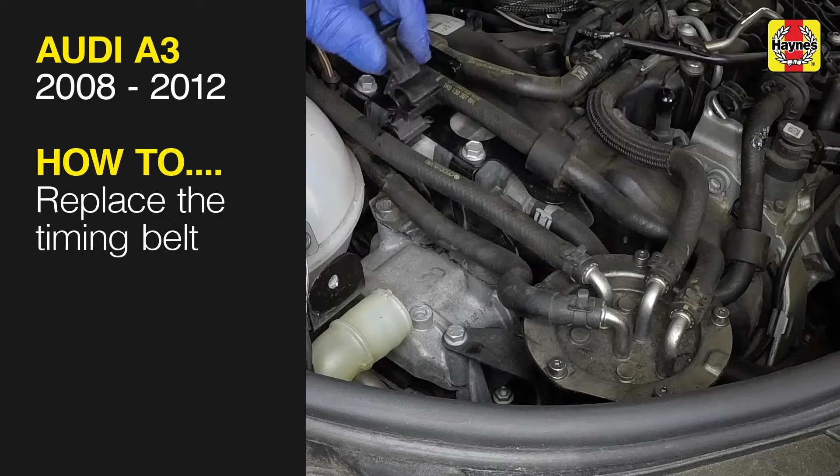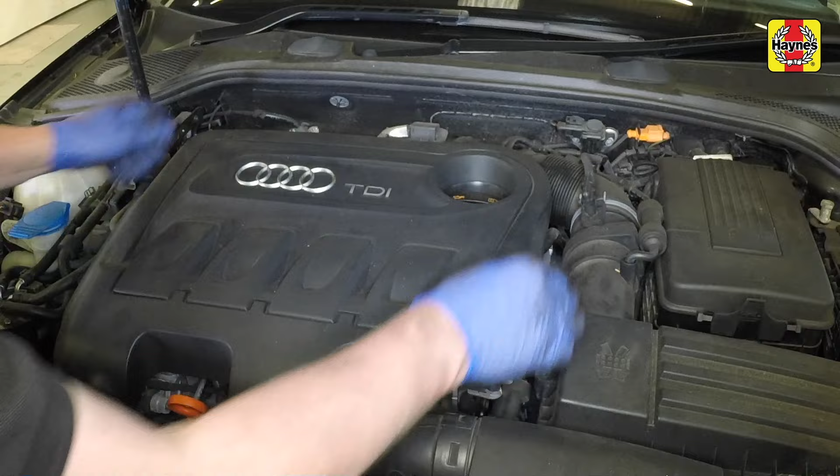Timing belt renewal. Pull the plastic cover upwards to release the mountings. Removal. Using the tool provided, remove the centre cap from the wheel. Where necessary, use the locking wheel bolt adapter and slacken each of the wheel bolts half a turn.

Position the workshop jack adjacent to the jacking point indicated by a triangular notch in the sill. Raise the vehicle until the tyre is clear of the ground, then place an axle stand under the sill flange at the jacking point. Remove the jack. Fully unscrew the bolts and remove the wheel.

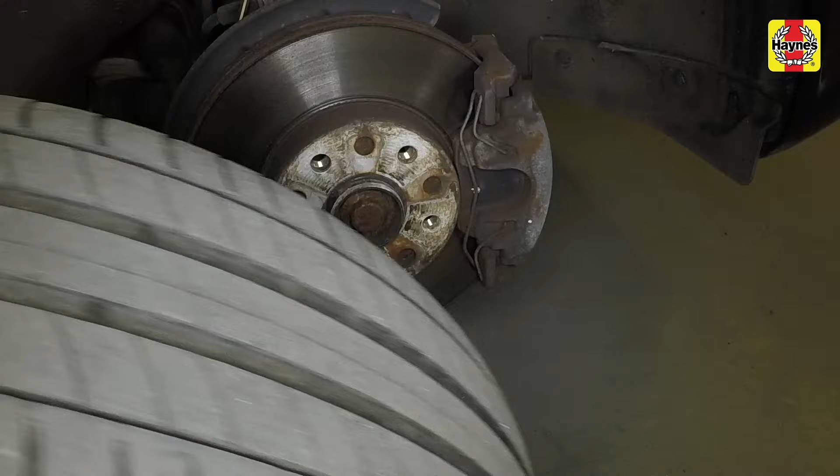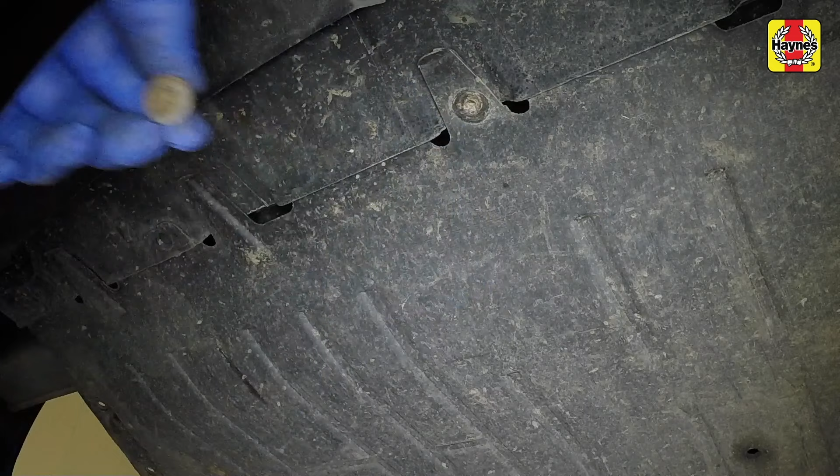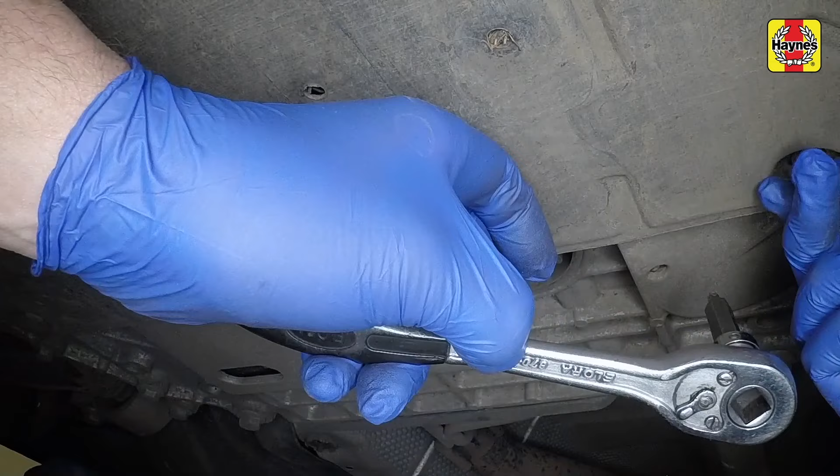Rotate the tensioner clockwise, then lock it in place using a suitable pin, drill bit or Allen key. If the belt is to be refitted, mark its original direction of rotation. Engine under tray. Remove the single screw at the front edge of the under tray. Undo the Torx screws along the outer edges and the screws at the rear. Slide the under tray rearwards and remove it.

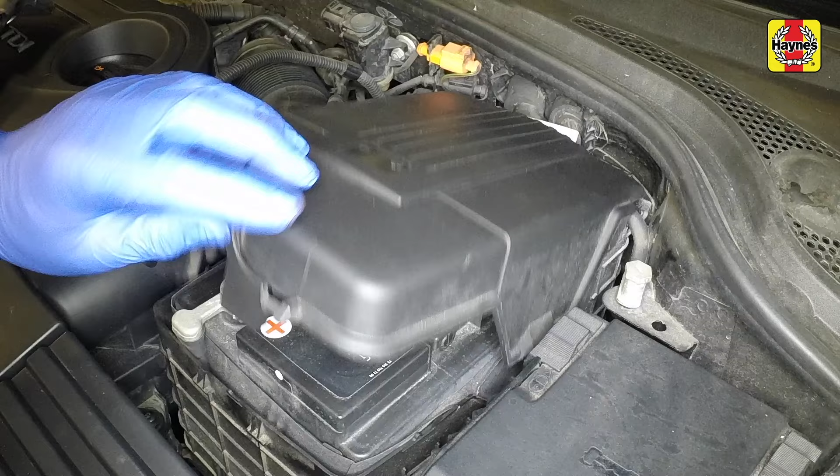Battery negative lead disconnection and reconnection. Release the clip, remove the battery cover and terminal cover, then slacken the nut and pull the negative lead clamp from the battery terminal. Position the clamp to one side to prevent accidental reconnection. It's also advisable to insulate the battery terminal to prevent accidental reconnection.

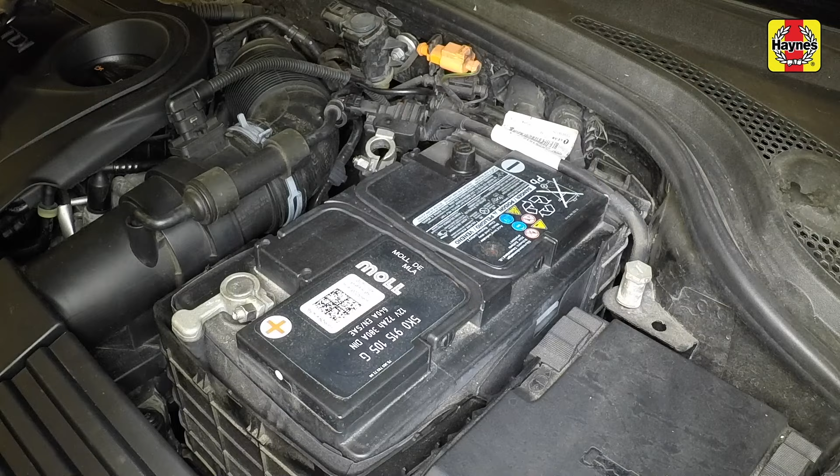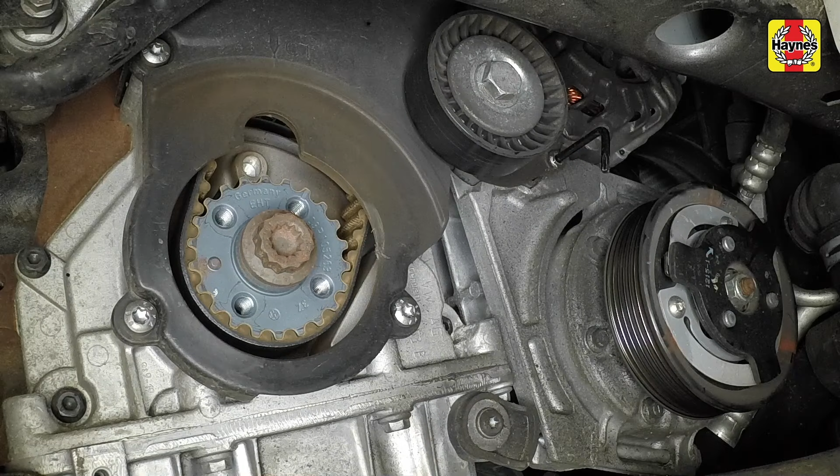Unscrew the 4 bolts securing the crankshaft pulley. Prevent any rotation by counter-holding the hub bolt with a socket. Remove the pulley from the crankshaft hub. Unclip the coolant hoses above the timing belt cover. Disconnect the wiring plug, undo the retaining bolt, and move the diesel particulate filter pressure differential sensor to one side. Undo the bolt and remove the screen wash fluid reservoir filler neck.

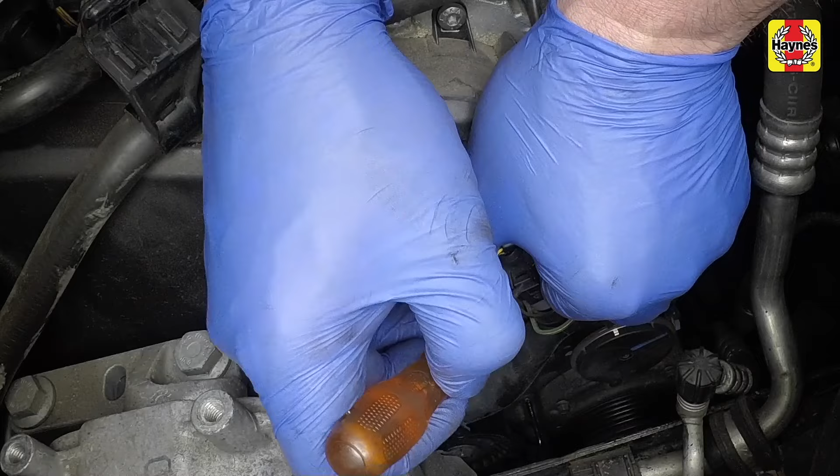Slide up and remove the hose clip. Undo the bolts securing the fuel pump bracket. Disconnect the fuel pump wiring plug. Release the pipe bracket from the fuel filter. Undo the bolts securing the fuel filter, then move the filter and pump to one side. Disconnect the coolant sensor wiring plug. Undo the bolt under the engine mounting bracket and the nut securing the coolant pipe.

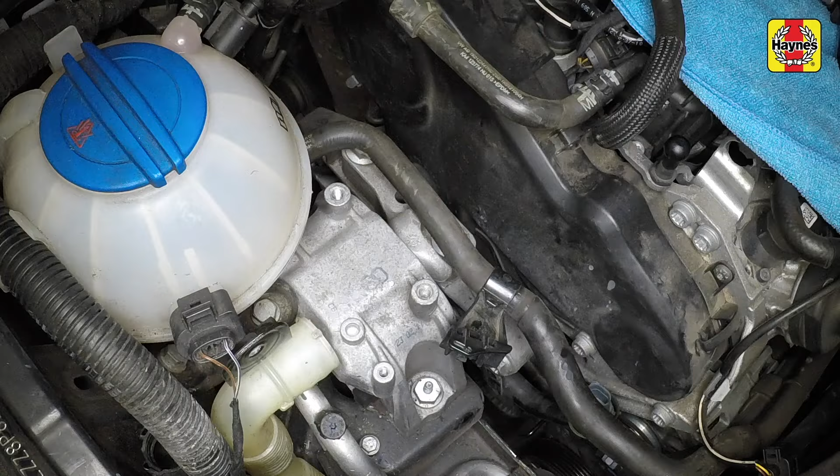Disconnect the wiring plug from the coolant expansion tank level sensor, then unclip the wiring loom, undo the bolts and move the tank to one side. There's no need to disconnect the coolant hose. Support the engine from below, then undo the bolts and remove the engine mounting brace. Slacken the bolts securing the engine mounting to the bracket and the mounting to body bolts. Remove the mounting along with the bolts.

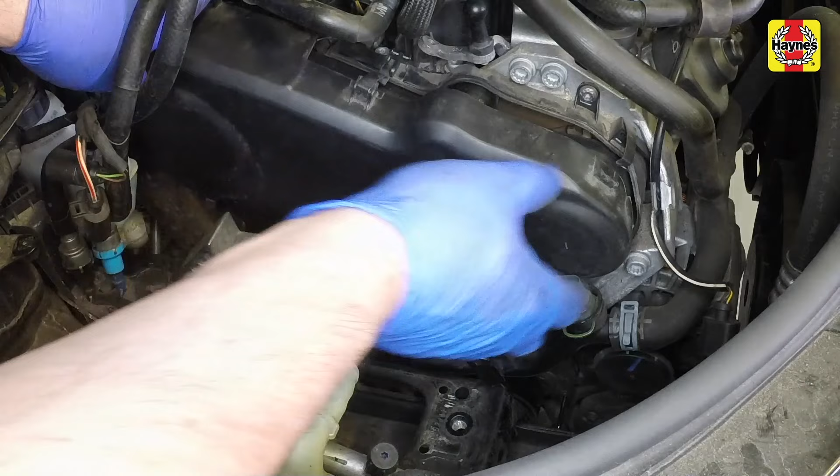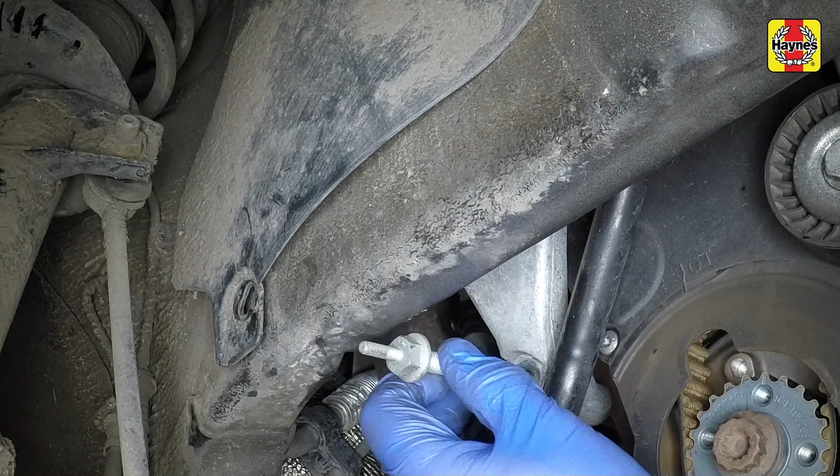Release the 3 clips and remove the timing belt upper cover. Lower the engine slightly, then remove the bracket lower bolt and slacken the rear bolt. It's not possible to remove the bolt at this stage. Remove the bracket front bolt, then remove the rear bolt and the bracket. Unlock the auxiliary belt tensioner and allow it to unwind. Undo the four bolts accessible from the wheel arch, then undo the upper bolt and remove the timing belt lower cover.

Rotate the crankshaft clockwise as necessary and fit the special locking and aligning tool. When the crankshaft is correctly positioned, the mark on the sprocket aligns with the mark on the special tool, and the locating pin engages with the hole in the oil seal housing. In this position, it should be possible to insert a 6mm diameter rod or locking tool through the hole in the camshaft hub and into the hole in the cylinder head.

Counterhold the sprocket, then slacken the retaining bolts 1/4 turn each. Note that new bolts will be required upon reassembly. Slacken each of the fuel pump sprocket bolts 1/4 turn each. Note that new bolts will be required upon reassembly. Using a hex or Allen key to hold the tensioner, slacken the nut, rotate the tensioner anti-clockwise and lock it in place with a 2mm diameter pin or drill bit. Lightly tighten the nut to secure the tensioner.

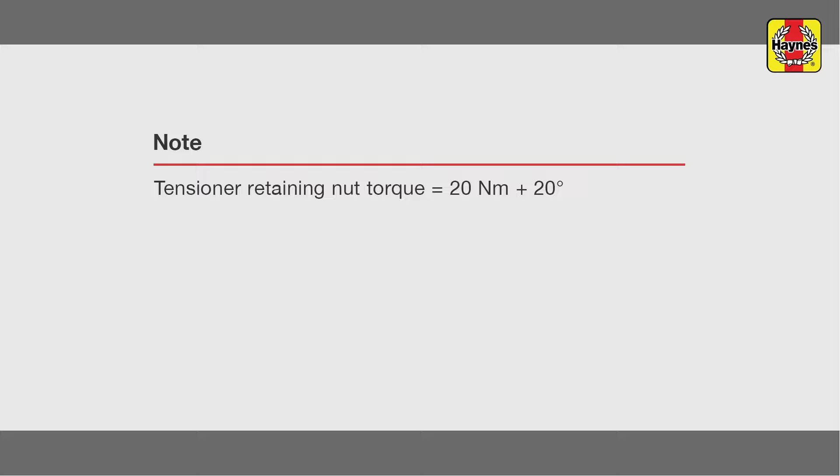Counterholding the camshaft sprocket, tighten the bolts to the initial torque setting. Likewise, tighten the fuel pump sprocket to the initial torque setting. Remove the fuel pump and camshaft sprocket locking bolts. Remove the crankshaft locking tool, then rotate the crankshaft 2 complete revolutions clockwise and refit the locking tool.

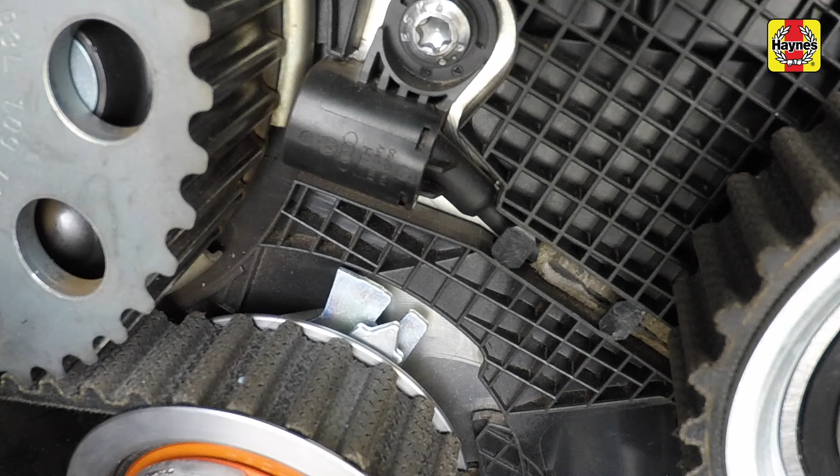Check that the tensioner roller indicator arm is centered or within a maximum of 5mm to the right of the notch in the base plate. If not, hold the tensioner hub stationary with an Allen key, slacken the retaining nut and position the arm in the center of the notch. Tighten the retaining nut to the specified torque. Remove the Allen key.

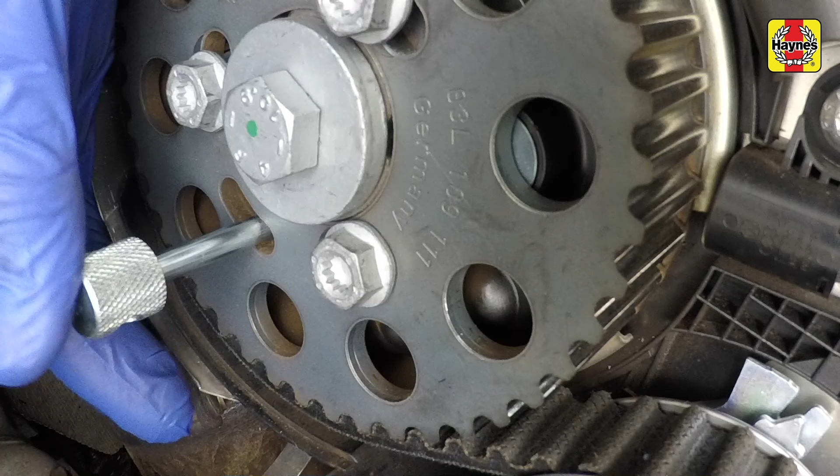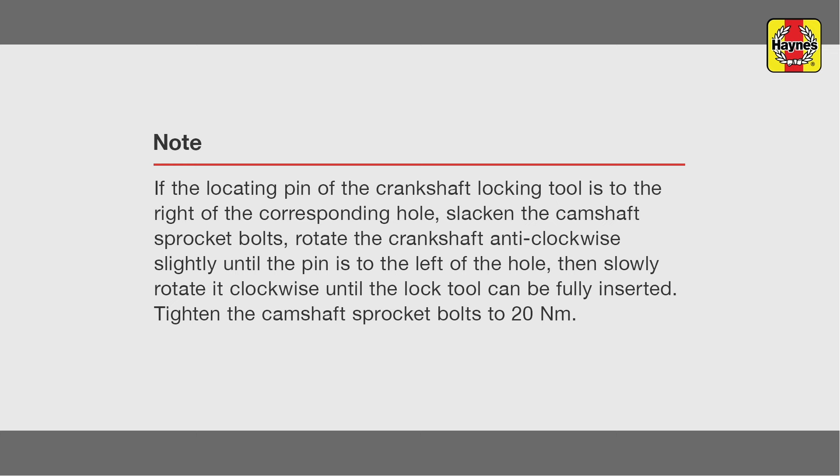Check that the camshaft sprocket locking pin can still be inserted. It's very difficult to align the locking pin of the fuel pump hub again. However, a slight misalignment of holes will not affect engine performance. Counterhold the camshaft sprocket and angle tighten the retaining bolts.

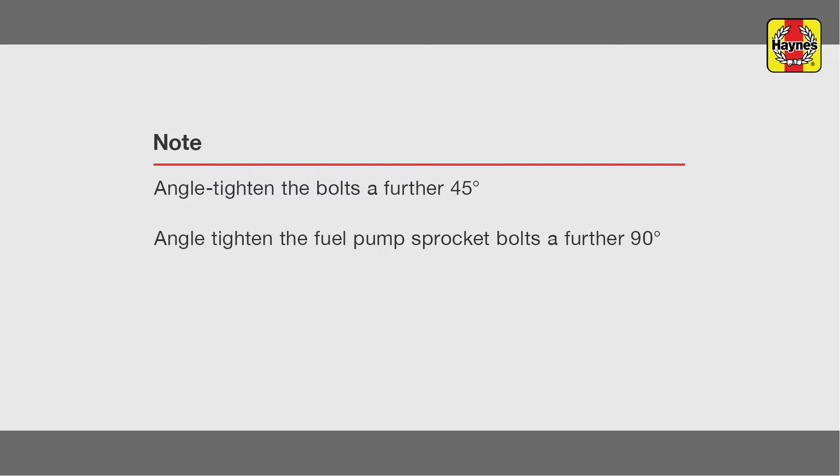Refit the timing belt lower cover and tighten the bolt to the specified torque. Refit the crankshaft pulley. Insert the new bolts. Tighten them to the specified torque and angle.

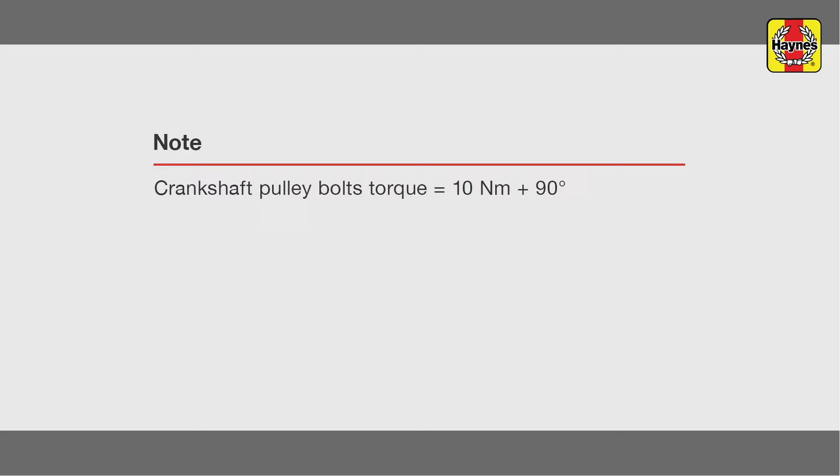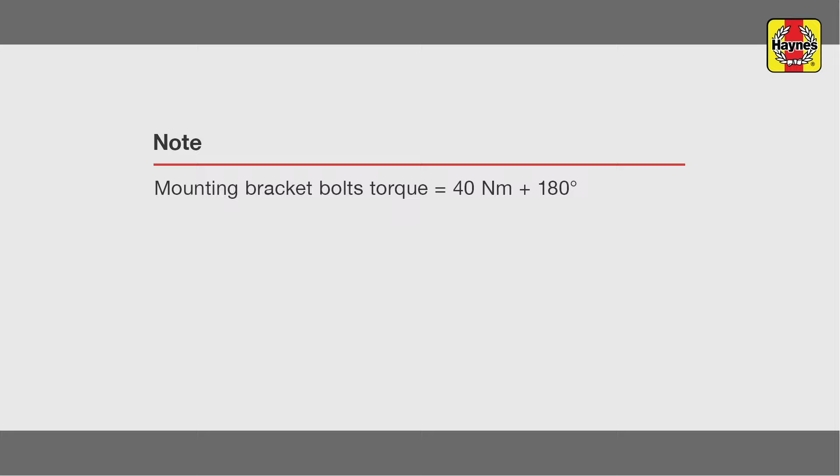Maneuver the mounting bracket into place and insert the new upper bolts. Tighten the front upper bolt to the specified torque. Insert the bracket's new lower bolt and tighten it to the specified torque. Likewise, insert the bracket's new rear bolt and tighten it to the specified torque. Maneuver the timing belt upper cover into place and secure it with the clips.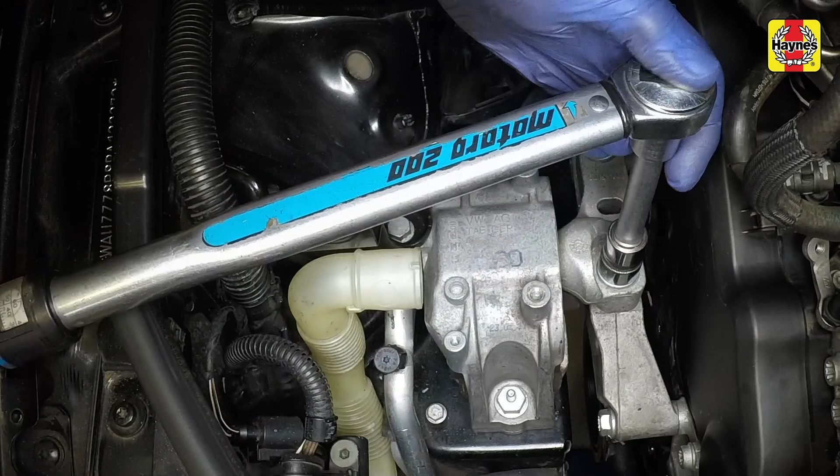If required, lower the engine slightly, then refit the engine mounting and brace. Insert the new bolts and tighten them to the specified torque. Tighten the brace bolt securely. Align the engine bracket with the mounting, then insert the new bolts. Tighten the mounting bolts to the specified torque. There must be at least 13.5 millimeters between the engine mounting bracket and the right-hand side chassis member.

Refit and tighten the coolant pipe bracket bolt. Locate the bracket over the stud and tighten the nut securely. Reconnect the temperature sensor wiring plug. Maneuver the coolant expansion tank back into place, then tighten the retaining bolts. Clip the wiring loom into place and reconnect the level sensor wiring plug. Refit the fuel filter and tighten the bolts. Refit the fuel pump and tighten the bolts.

Reconnect the washer fluid filler neck and secure it with the bolt. Secure the diesel particulate filter differential pressure sensor with the bolts and reconnect the wiring plug. Maneuver the under tray into position, then slide it forwards to engage with the front panel. Refit, then tighten the screws at the rear edge, outer edges, and the single screw at the front.

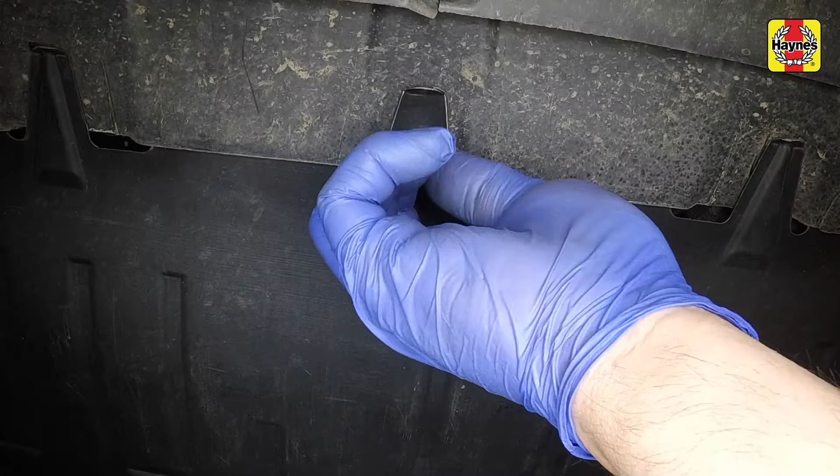Fit the new belt around the alternator and air conditioning compressor pulleys, then around the crankshaft pulley grooves and the tensioner pulley. Check the belt ribs locate correctly in the pulley grooves. Hold the tensioner and unlock it. Slowly release the tensioner and allow it to rest against the belt.

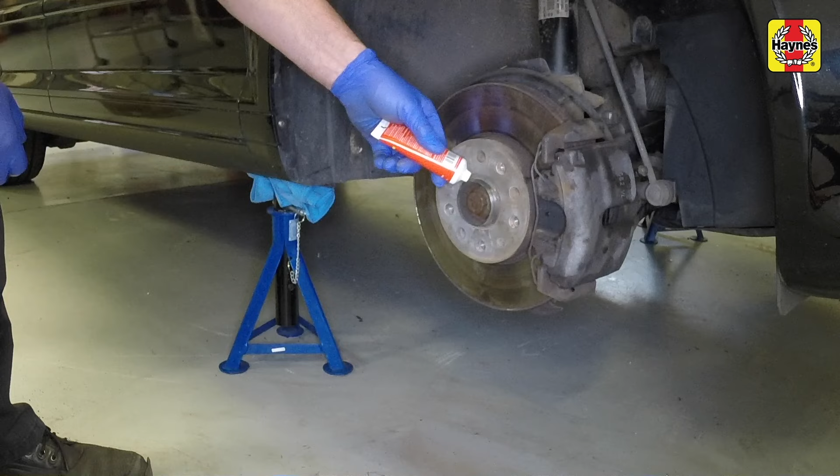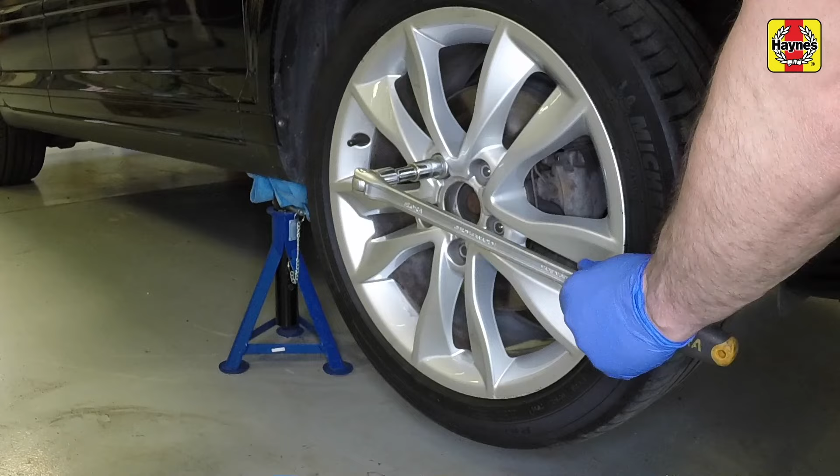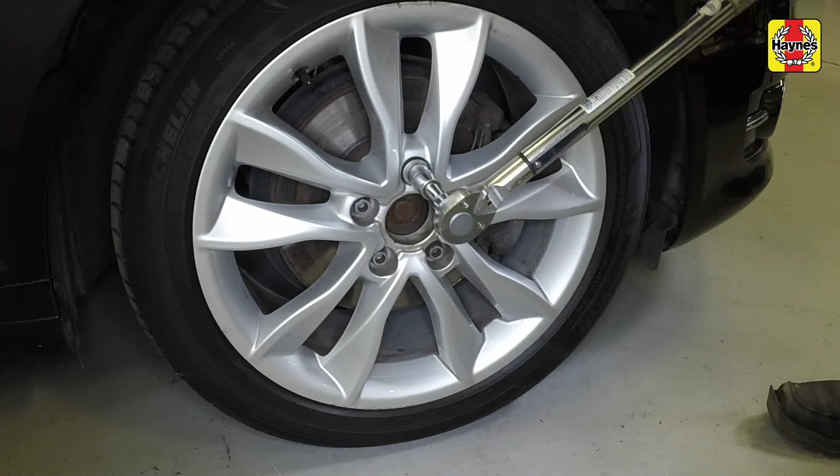Apply a little high temperature grease to the hub centre. Locate the wheel over the hub, align the holes, then insert the bolts and lightly tighten them. Raise the vehicle, remove the axle stand, then lower it to the ground. Tighten the bolts to the specified torque. Don't forget to refit the centre cap.

Press the negative lead clamp down over the battery negative terminal, then tighten the retaining nut securely. Where applicable, refit the terminal cover, then refit the battery cover. Align the cover with its mountings and press it firmly down into place.